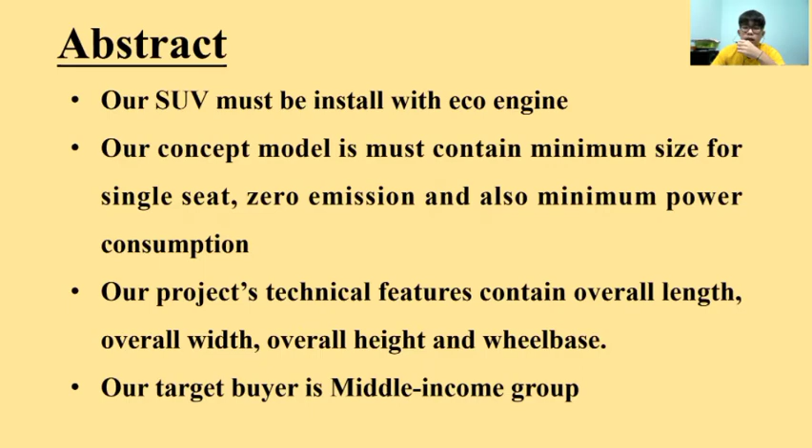Abstract: our SUV must be installed with an eco-engine, and our concept model must contain minimum size for a single seat, zero emission, and also minimum power consumption. Our project's technical features contain overall length, overall width, overall height, and also wheelbase. Our target buyer is the middle income group. Here's our project contribution part.

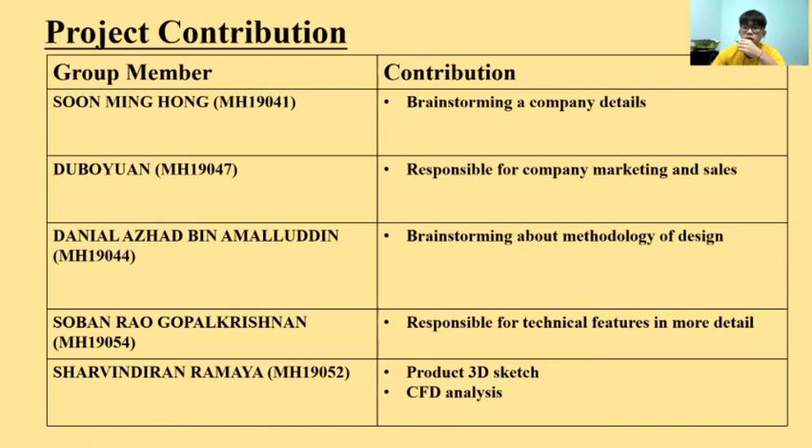My contribution is brainstorming the company details, while Duboyuan will be responsible for company marketing and sales. Danial will brainstorm about the methodology of design, while Soban will be responsible for technical features in more detail, and Sharvindiran will be responsible for the product 3D sketch and also doing CFD analysis.

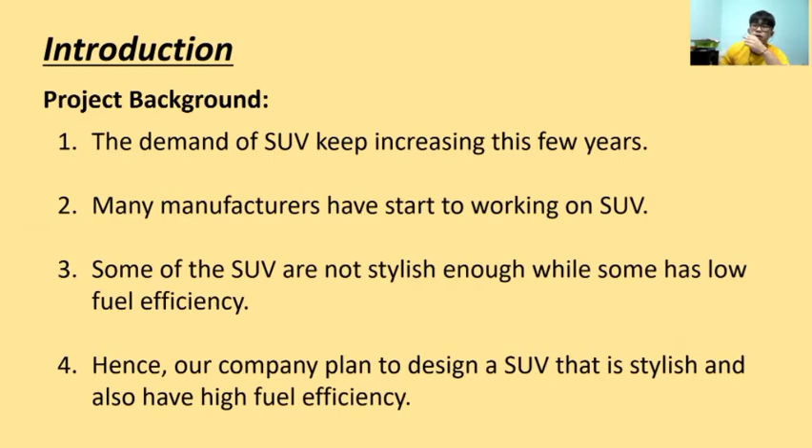Here is our introduction, our project background. The demand for SUVs keeps increasing these few years, and many manufacturers have started working on SUVs. But some SUVs are not stylish enough, while some have low fuel efficiency. Hence, our company plans to design an SUV that is stylish and also has high fuel efficiency.

Our company, Autopro Sdn Bhd, is an automotive manufacturing company that has been operating for more than 30 years. Our company provides car manufacturing and also designing services. Our company is located in DRB Hicom Automotive Park, Pekan Pahang, with sales dealers all around the world. Our company's focus is on producing vehicles that have high performance, high fuel efficiency, and are also stylish.

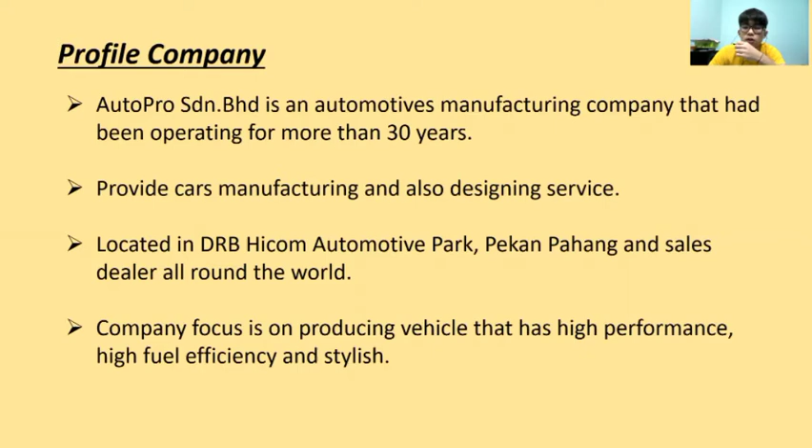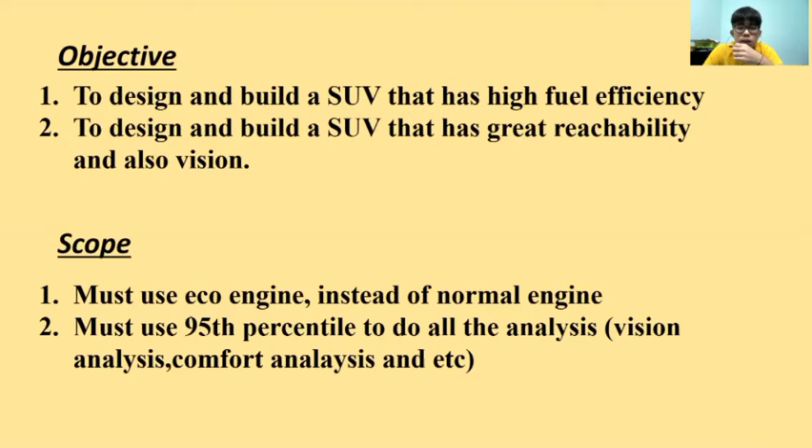Our project objective is to design and build an SUV that has high fuel efficiency, and also to build an SUV that has great reachability and vision. Our scope: we must use an eco engine instead of a normal engine, and must use the 95th percentile to do all the analysis, including vision analysis, comfort analysis, and many others.

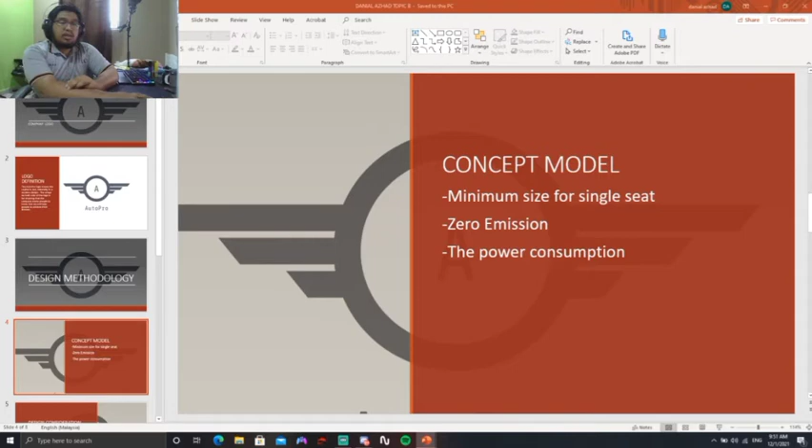It must fit the design for the customer and have an affordable price for our buyers to pay. It must have great aerodynamics, and it must follow green technology to save our earth, and it must have great power efficiency.

Good evening. Today I'm going to present about the technical features of our car. My name is Soban Rao Gopalkrishnan, and my matric number is MH19054. Okay, let me start with the first point: the dimensions of the body.

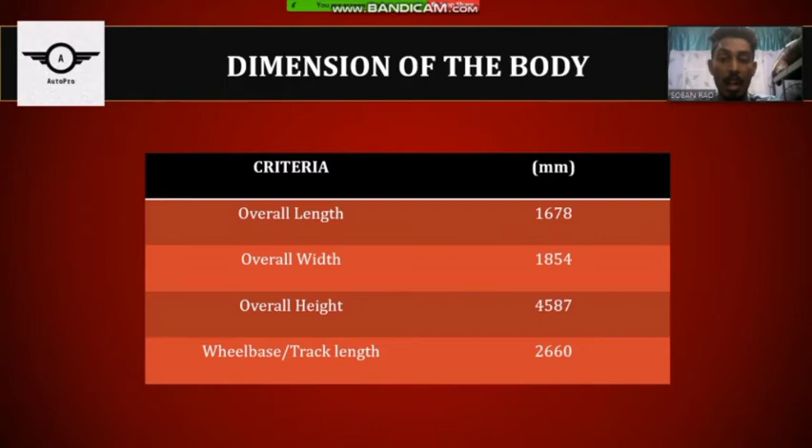The overall length of the car is 1678, the overall width is 1854, the overall height is 4587, and the wheelbase and track length is 2660. Next, you will see the drivetrain system.

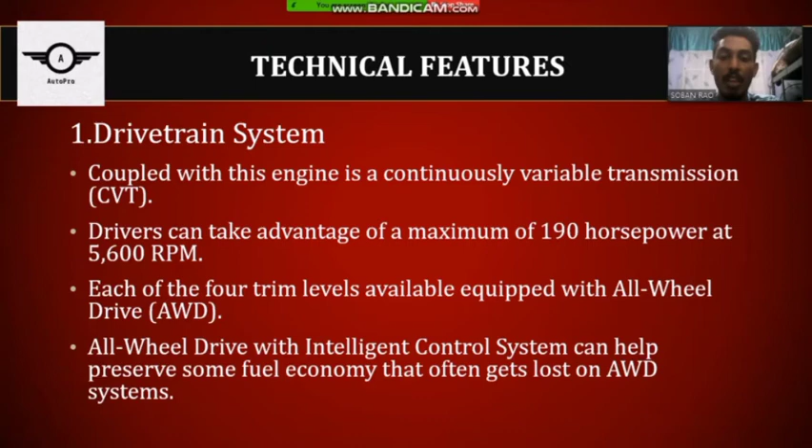The car is coupled with this engine using continuously variable transmission, CVT. The driver can take advantage of a maximum of 190 horsepower at 5600 RPM. Each of the four trim levels available is equipped with all-wheel drive, and all-wheel drive with Intelligent Control System can help preserve some fuel economy that is often lost in AWD systems.

Next, you will see the powertrain system: DOHC 16-valve Atkinson-cycle, 2.0 liter inline-4, 143 HP, 129 lb-ft.

Permanent magnet synchronous AC motor, 181 HP, 232 lb-ft. The combined output is 212 HP and 232 lb-ft, with a 1.4 kilowatt-hour lithium-ion battery pack.

The auxiliary features are vehicle stability assist with traction control, LED daytime running lights, multi-angle rear view camera, advanced front airbags with a rollover sensor, and forward collision warning.

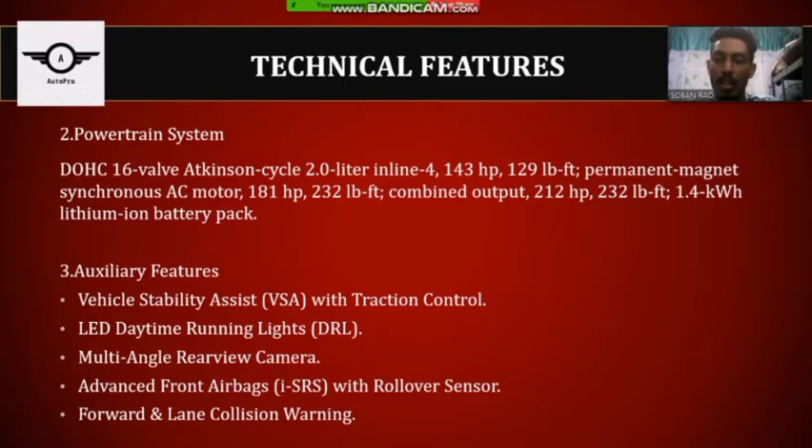Next we will see the vehicle competitors for our car: the 2020 Mitsubishi Outlander and the 2020 Hyundai Tucson.

We will compare engine types. For all three, the displacement is the same. The horsepower for two of them is the same at 184, while the Mitsubishi Outlander has only 166 HP. The torque is the same for both AutoPro and the Hyundai Tucson, while the Mitsubishi Outlander has only 162. The transmission for all three is also the same.

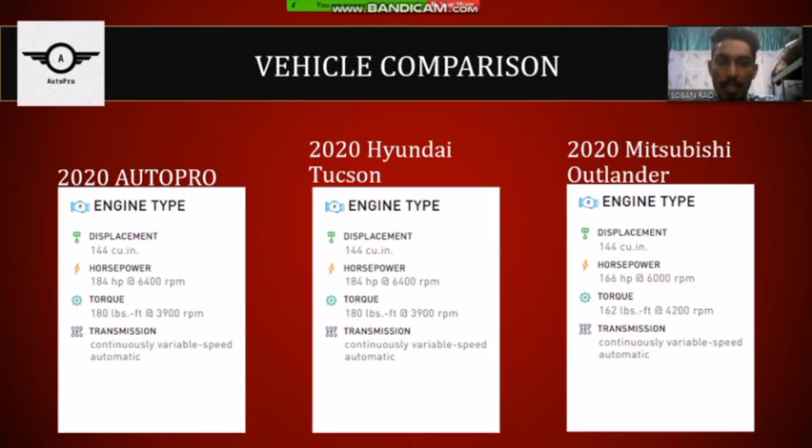Next we will look at the chassis. For AutoPro we use a body-on-frame architecture, while both the Hyundai Tucson and Mitsubishi Outlander use a unibody. The front and rear suspension are the same for all three.

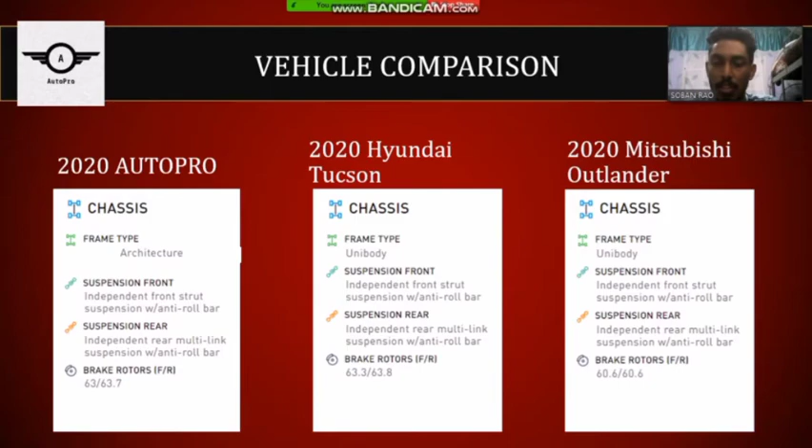My name is Sharvindiran Ramaya, matric number MH19052. Today I would like to present my part of the project: the AutoPro sketching designs, the SolidWorks flowchart, AutoPro's modeling, AutoPro's final design, the computational fluid dynamics (CFD) of AutoPro, and the downforce and drag force results from the CFD.

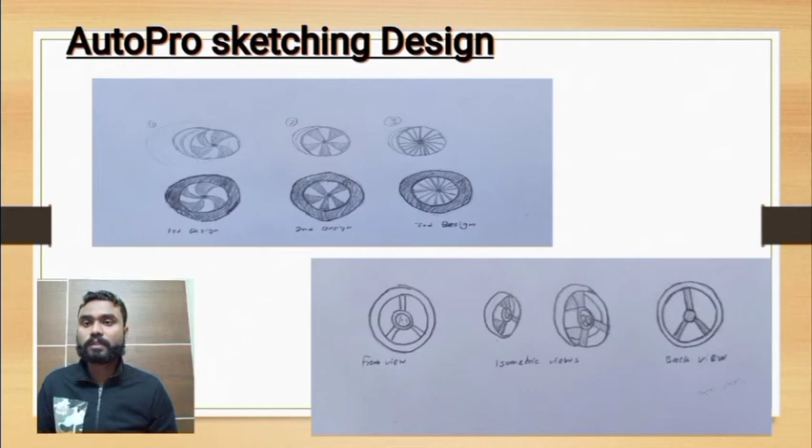These are the AutoPro sketching designs I made initially. The diagram above shows the tire sketches, and below is the steering wheel sketches.

This is the flowchart of SolidWorks, showing how I did this model using SolidWorks. I would like to explain it briefly.

Part 1, step 1: installing SolidWorks. Step 2: modeling the basic desired car shape. Step 3: making different models of parts such as steering wheels and tires.

Step 4: detailing the parts and the model, such as adding features, more surface planes, gaps for windows, and inserting tires, headlamps and signal lamps. Step 5: detailing the steering wheel and tires further to make it look more realistic.

Step 6: we assemble the separate parts to make a finished car model, then provide color to the AutoPro model, then apply Realview graphics, which also makes it look more realistic.

In part 2, we apply CFD analysis to the already completed AutoPro model, which can be done using SolidWorks. Step 8: applying cut plots, goal plots, surface plots, and trying out different flow trajectories to see the CFD flow.

Step 9: getting the downforce and drag force values and graphs using the goal plot functions, which I will explain later. Step 10: saving the flow trajectories, animation, downforce and drag force graphs, and the different plane views of our AutoPro model for the presentation.

That is all for the flowchart part.

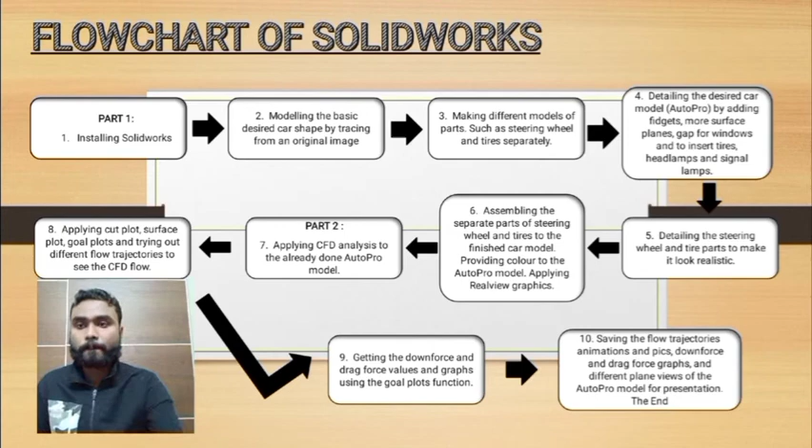This is the AutoPro's final design after I assembled it, provided color to it, and used real view graphics to make it look more realistic.

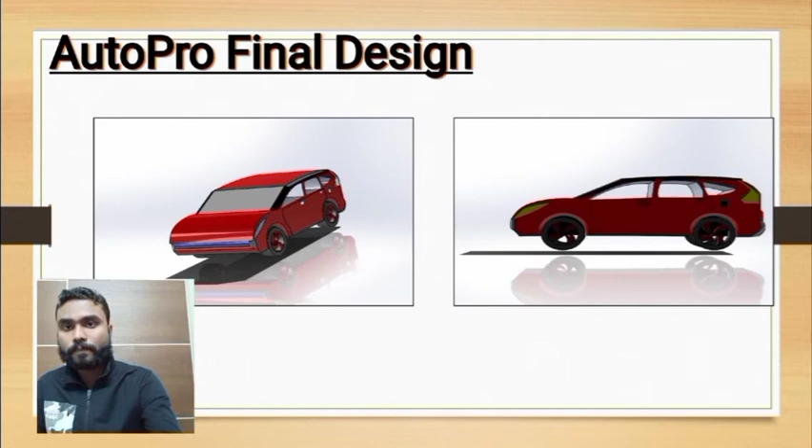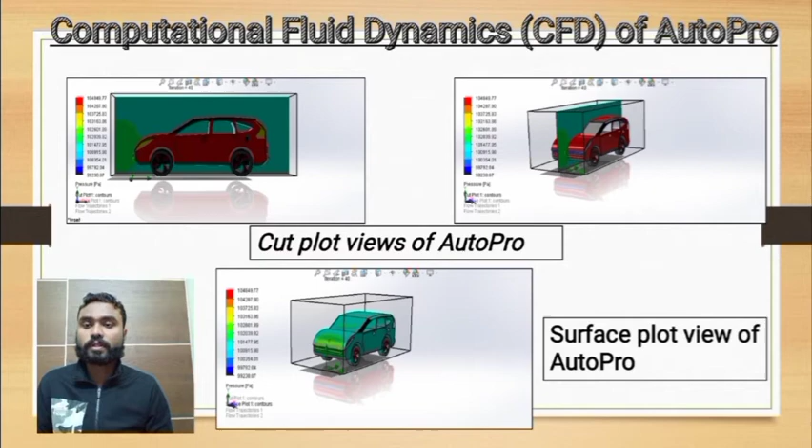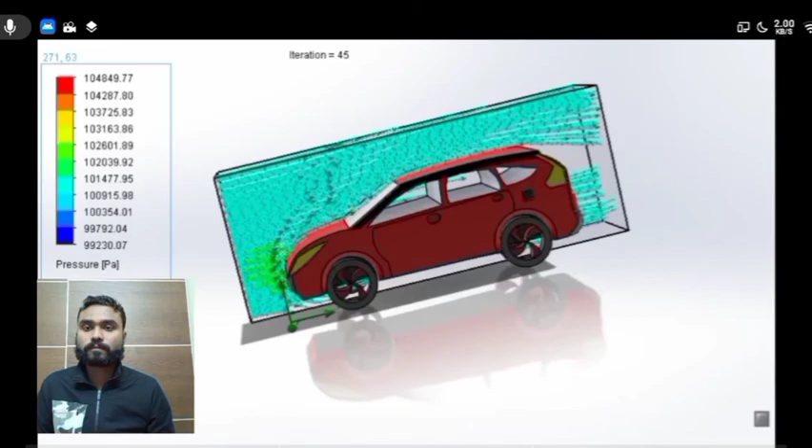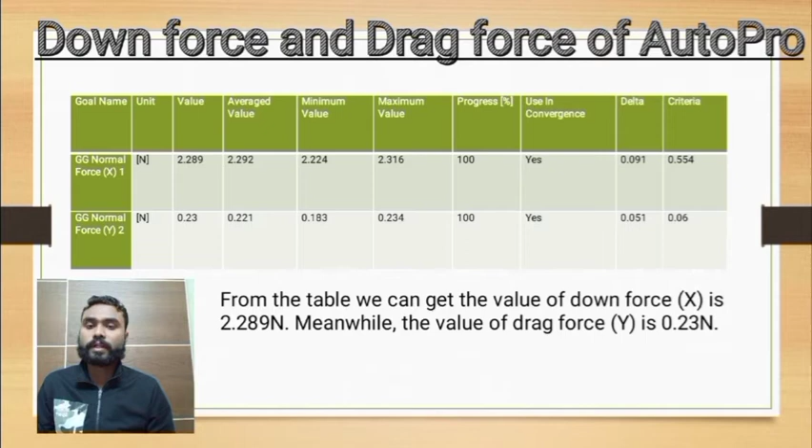Moving on to the downforce and drag force of our AutoPro model. Just as I told you, we can use the goal plot function in SolidWorks to get this table and all the values. From the table, we can get the value of downforce X as 2.289 Newton, meanwhile the value of drag force Y is 0.23 Newton.

And finally, the drag force. You can see the drag force Y graph of our AutoPro model, which is increasing until the value 0.23 Newton. Okay, that is all for my part of SolidWorks designing and CFD analyzing.

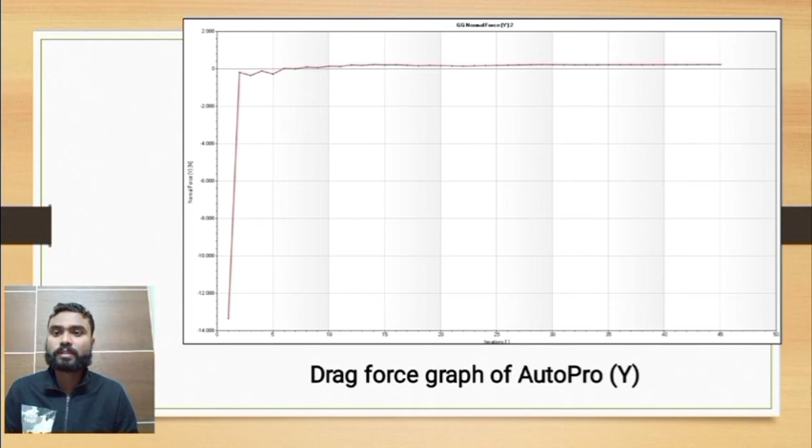So we use: how many units do we need to sell monthly to break even? This question is to discuss cost and break-even. So analyzing this problem depends on fixed coverage and the service absorption. The total fixed overhead is net of the total dealership expenses less the total variable expenses.

So for example, if our fixed coverage is 60%, then the unabsorbed expense, or burden as it's commonly called, is 40% plus the total of variable expenses. So we subtract the total of variable expenses and the unabsorbed expenses from our total dealership expenses, which equals to the unabsorbed expenses, or the money amount of gross.

So we must generate new and used vehicle sales and the net finance and insurance. This unabsorbed expense is then divided by our total gross per vehicle to determine the number of units we must sell to break even.

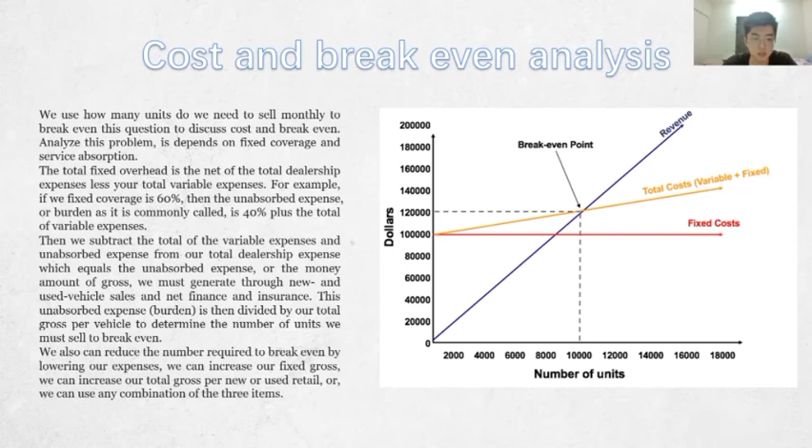So we can also reduce the number required to break even by lowering our expenses, and we can also increase our fixed gross, increase our total gross per new and/or used retail, or use any combination of the three methods. So this is fixed cost and variable cost.

Fixed cost versus variable cost is the difference in current business costs at either static or fluctuating when there is a change in activity and sales value. Fixed cost includes expenses that remain constant for a period of time regardless of the level of output, like rent, salaries, and loan payments, while variable costs are expenses that change directly and proportionally to the change in business activity level or volume, like direct labor, taxes, and operational expenses.

So fixed expenses include auto insurance and property taxes, and variable costs include oil and tires. And this is break-even units.

Break-even units equal fixed cost divided by revenue per unit minus variable cost per unit. So when we determine a break-even point based on sales money, we divide the fixed cost by the contribution margin. The contribution margin is determined by subtracting the variable cost from the price of a product.

Okay, thank you. So we go to the next part, which is safety and regulation.

Okay, so for the seat belts and head restraints: the head restraint is only for the driver and front seat, and for the passenger and rear seat. So the advanced belt features are standard features, and it has an adjustable upper belt anchorage for the driver and front passengers. The seat belt reminder system is only for the driver and front passenger.

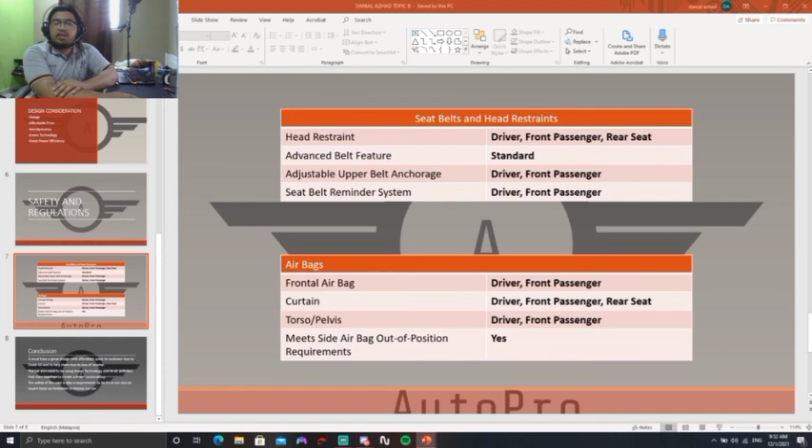So the conclusions are: it must have a great design with an affordable price for customers due to COVID-19, to help them due to loss of income. The car also needs to use green technology due to the air pollution that rises nowadays, to create a better surrounding. The safety of the user is also a requirement to be fulfilled in our cars, so buyers have no hesitation to choose our car.